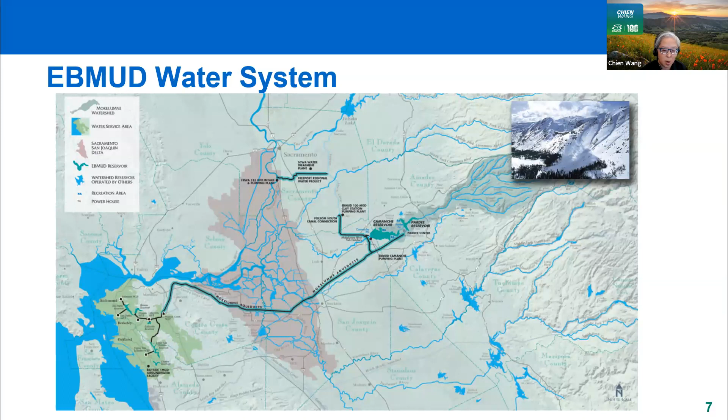East Bay MUD water starts as snowmelt in the Sierras in the Mokelumne watershed near Lodi, California. Water is then stored at the Pardee Reservoir before traveling about 90 miles through the Mokelumne aqueducts to the East Bay service area, where it is treated at one of East Bay MUD's water treatment plants, including the Walnut Creek water treatment plant. During droughts, we can also have supplemental water supplies delivered via the Freeport Regional Water Facility near Sacramento. The East Bay MUD service area distribution system, with 167 reservoirs, 136 pumping plants, and approximately 4,200 miles of pipelines, serves over 1.4 million customers and 29 cities over 2 counties.

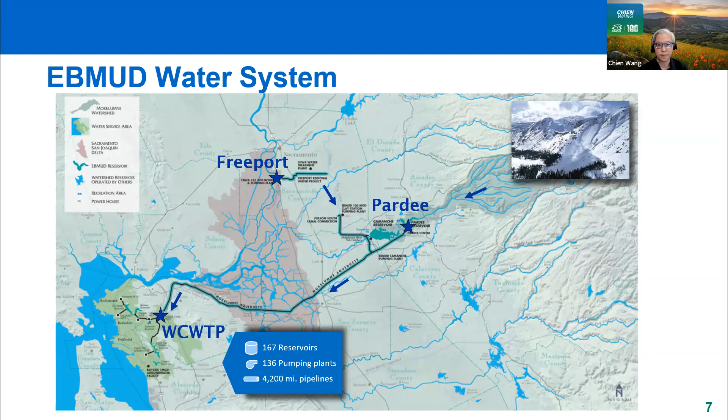The Walnut Creek water treatment plant was constructed in 1967, and the aerial photo on the left shows the plant at about 1 year old. In the photo, you can see the operations building and the gravity filters in the center, and the original clear well in white on the left, where water was stored before being pumped to customers. Alfred Avenue is on the right, and you can see the beginning stages of Ramsey Circle and Cornwall Court at the top of the photo.

The Walnut Creek water treatment plant provides the primary water supply for East Bay MUD's East of Hills service area, shown in blue on the right, including Walnut Creek and Lafayette, and portions of Pleasant Hill, Alamo, Danville, Blackhawk, and San Ramon Valley communities.

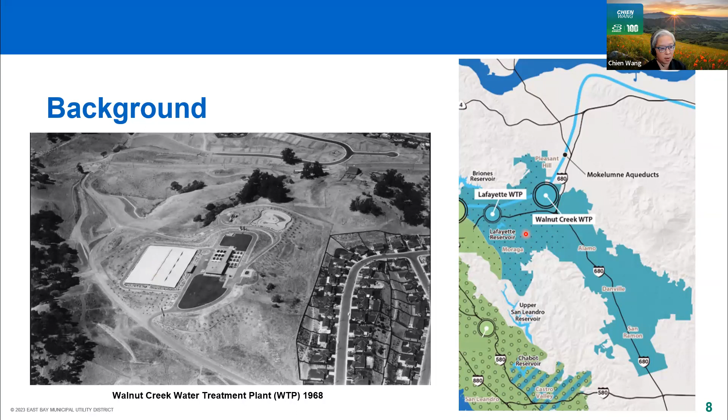The Walnut Creek water treatment plant was designed to use its inline gravity filters to treat clear snowmelt water from the Mokelumne watershed. However, due to climate change and other factors, the water treatment plant needs to adapt to changing source water quality, such as high rainfall runoff in atmospheric rivers.

So you can see in the photos here on the left of Pardee Reservoir, the effects of warm, heavy rains leading to high turbidities or murky water in the reservoir. We see that same turbid water arriving at the water treatment plant filters. Bottom right shows recent wildfires in the Mokelumne watershed. The watershed itself is outlined in blue, and recent fires from 2015, 2021, and 2022 are shown in red in the vicinity or even within parts of the watershed. We can now expect almost immediate effects on water quality from wildfires.

Also, the Walnut Creek water treatment plant needs to be able to treat and deliver supplemental supplies from the Freeport Regional Water Facility during droughts. These more frequent high turbidity events reduce the filtration capacity and add taste and odor at the Walnut Creek water treatment plant. So the purpose of the project is to treat a broader range of water quality on a more reliable basis, improve water quality, taste, and odor, and increase the water treatment plant capacity to meet planned future demands.

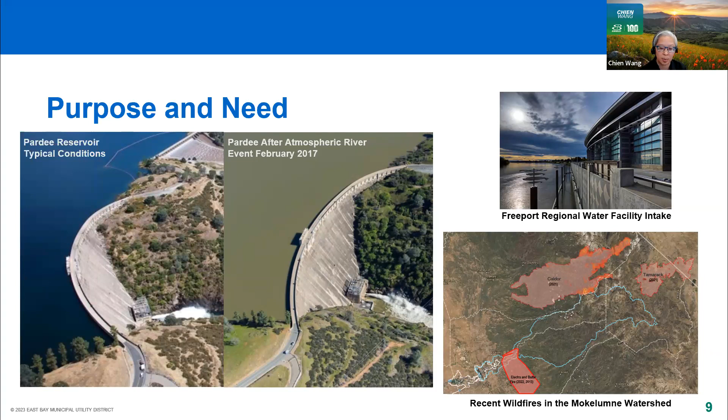Here is a site plan that shows the new project components. The entrance from Larkey Lane is at the bottom right, just for your reference. The project would be constructed in 2 phases because the plant is roughly bifurcated into 2 halves, with phase 1 components shown in purple and phase 2 components shown in blue.

The orange highlights the 4 ballasted flocculation basins, which can quickly treat high turbidity water in a very small footprint, where the water portion from these is sent to the existing filters, and the sediment portion at the bottom of the basins will drain to the new solids thickening facilities shown in brown. These are where solids from the basins will be dewatered and compacted before disposal.

The pink highlights the new ozone treatment that also addresses taste and odor before and after the ballasted flocculation basins. The building shown in dark green consolidates existing maintenance shops, lockers, and offices that need to be demolished for the project.

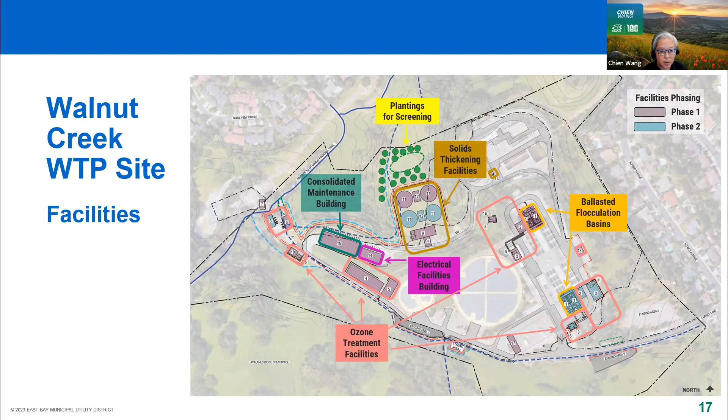At the top of this plan, the yellow shows where trees will be planted for screening north of the new gravity thickeners retaining wall that are part of the solids thickening facilities. The proposed buildings were designed so that their architecture would match existing buildings at the water treatment plant, which consist of a mix of concrete and metal structures.

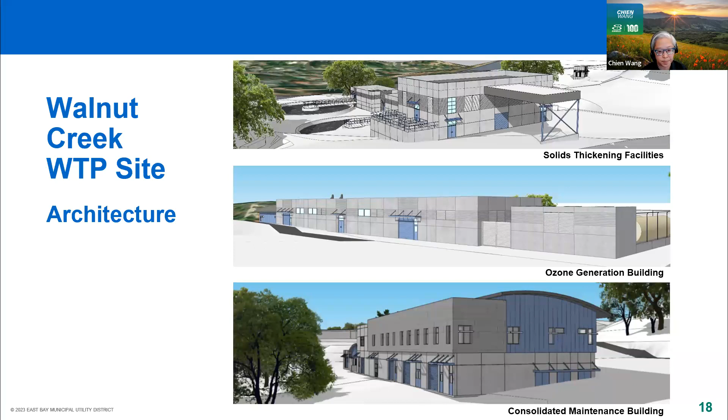The solids thickening building facilities include the 2-story concrete dewatering building and truck loading canopy shown at the top. The middle rendering shows the ozone generation building, and the bottom shows the 2-story consolidated maintenance building. Other smaller structures are similar in design.

A social footpath is an unofficial, user-created path that forms over time, established by the community through regular use. During construction, the existing social footpaths would be temporarily closed with appropriate signage for the duration of phases 1 and 2 for public safety.

After construction, security fencing will be installed around the new facilities, and social footpaths will be redirected around those new facilities and fencing as close to existing paths as possible at the end of phase 1.

The constructability analysis identified a need for staging areas in addition to existing spaces throughout the water treatment plant. So staging areas 1, 2, and 3 are new staging areas and will be constructed along the south side of the main access road. Staging area 4 is an existing parking lot near the entrance that will be used for material and equipment storage on the western half and for worker parking on the eastern half.

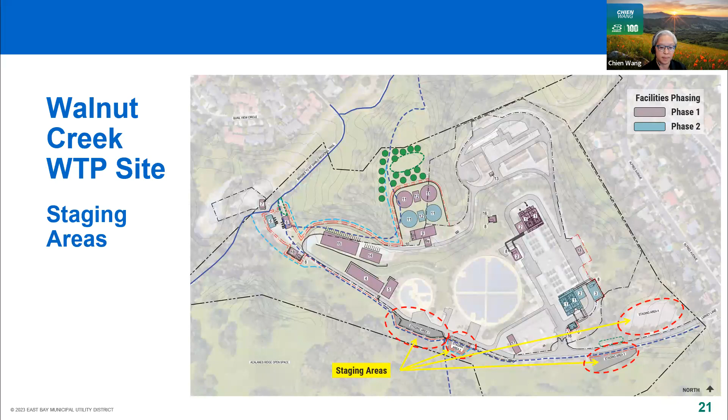As part of the new pretreatment processes at the Walnut Creek Water Treatment Plant, minor hydraulic modifications are required at the Lafayette Water Treatment Plant to increase the water pressure within the aqueducts serving the project.

The modifications at the Lafayette Water Treatment Plant will be completed during phase 1 of the project and include construction of a new Lafayette Weir number 1, increasing the height of the existing Lafayette Weir number 2 by approximately 10 feet, and new pipelines connecting to the weirs. After that, the existing old Lafayette Weir number 1 will be demolished.

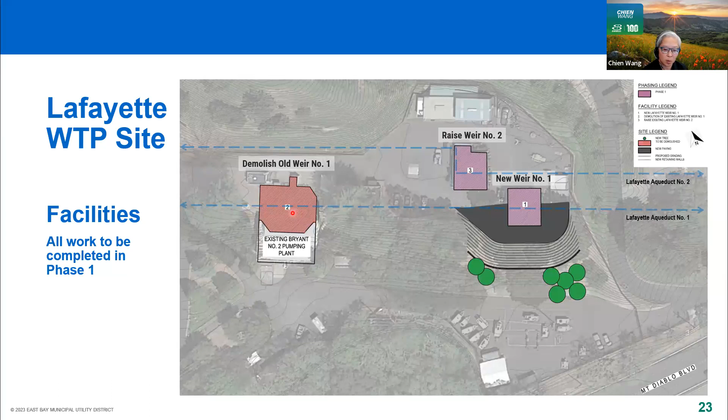Public outreach and notification has been ongoing throughout the EIR process. Outreach meetings with staff from the City of Walnut Creek, City of Lafayette, East Bay Regional Park District, and Temple Isaiah were held throughout 2021 and 2022.

A community outreach and scoping meeting was held in March, like I mentioned previously, to present the conceptual site and landscape plans and discuss the potential environmental factors to be addressed in the draft EIR and receive community feedback. Postcards about that community meeting were sent to affected residents near the project and posted on Nextdoor and the district's website. A project briefing was provided to the City of Walnut Creek City Council in March of 2023.

The 2 closest schools, Buena Vista Elementary and Contra Costa Christian Schools, were also notified of the publication of the draft EIR.

Issues and concerns raised by agency staff, the Walnut Creek City Council, and the community included construction-related traffic, noise, and dust, and potential impacts on trails and open space, as well as aesthetics, all of which are addressed in the draft EIR.

In every project, EBMUD incorporates standard practices and procedures and construction specifications to ensure best management practices for issues such as dust, noise, and traffic are implemented. The next few slides will go over some of these standard practices.

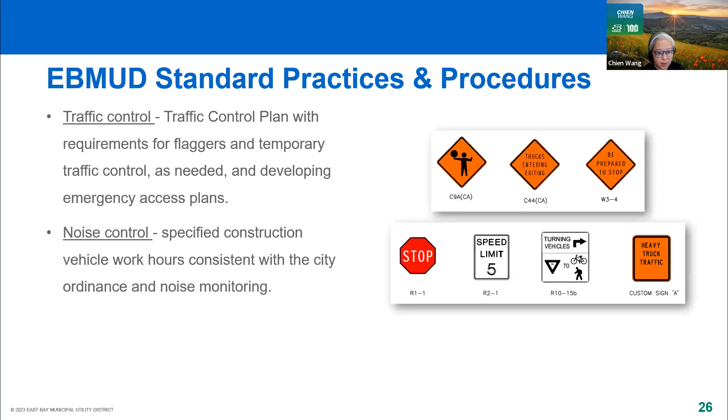For traffic control, a traffic control plan will be required to manage flaggers and temporary controls as needed, and for developing emergency access plans. Also, noise control measures will include specified construction vehicle work hours consistent with the city ordinance and noise monitoring.

For the protection of biological resources, there will be required training on special status species, pre-construction biological surveys, and avoidance measures if any species are encountered.

For the protection of cultural and paleontological resources, there will also be resource awareness training and immediate stop work and EBMUD notification if any unexpected encounters occur.

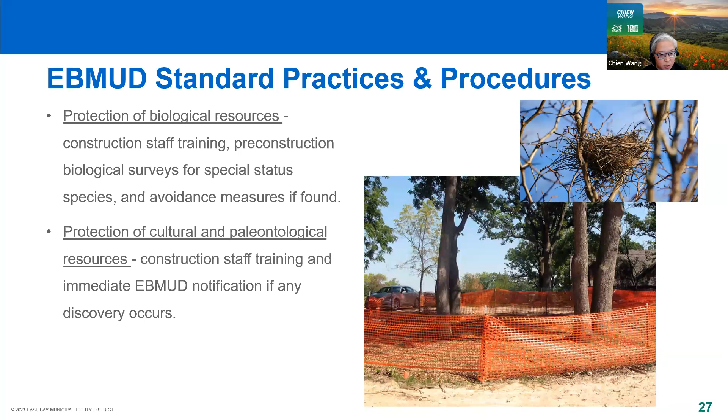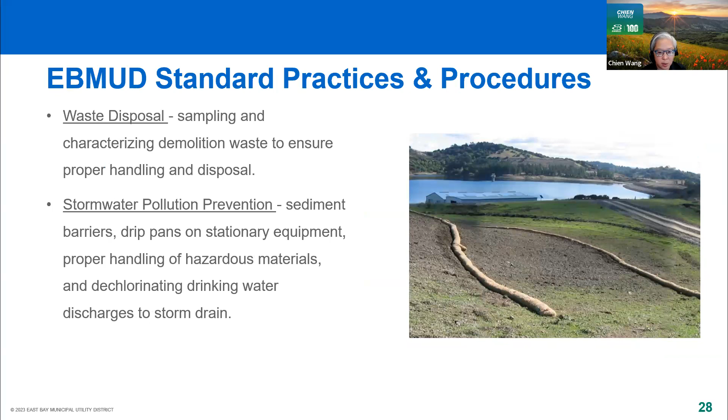For waste disposal, EBMUD has procedures that require sampling and characterizing demolition waste to ensure proper handling and disposal. For stormwater pollution prevention, sediment barriers, drip pans, and dechlorinating drinking water discharges will be required.

EBMUD standard practices also include designating a public affairs liaison to respond to construction-related concerns from the community, and notification in advance of potentially disruptive construction activities such as noise or traffic, including extent and duration of the activity.

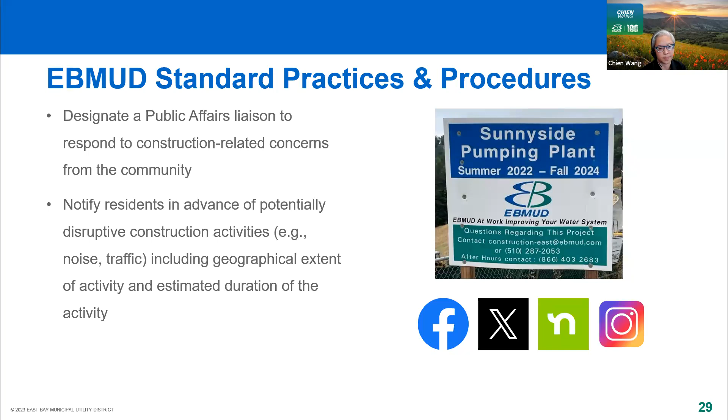Also, one specific aspect of noise was determined to be a significant and unavoidable impact. I'll go into detail on that on a later slide.

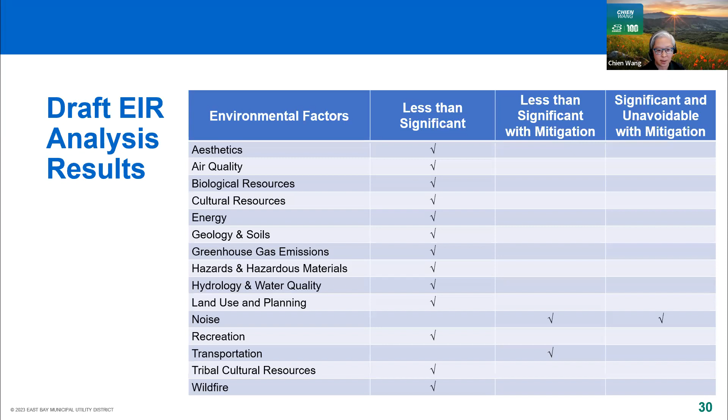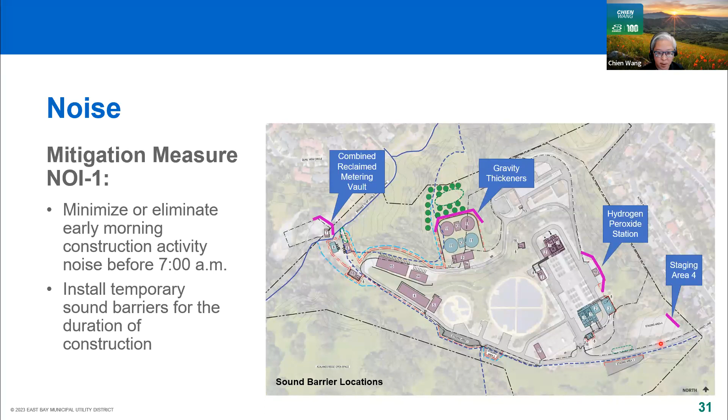For the noise mitigation measures that are required for the project, these emphasize the need to minimize or eliminate early morning construction noise before 7 a.m. And also it requires the installation of temporary sound barriers for the duration of construction at 4 locations. These include the combined reclaimed metering vault, the gravity thickeners, the hydrogen peroxide station, and at staging area 4 along the eastern side of that staging area.

The significant and unavoidable impact I mentioned earlier applies to early morning hour concrete truck noise that is anticipated during extended large concrete pours. These extended pours require a start time of 6 a.m. to minimize disruptions in the pour that could affect the quality of the concrete work and service life of the new facilities being constructed.

The noise is significant and unavoidable for the off-site concrete trucks along the haul route before 7 a.m. We estimate about 40 days of this extended pour work during phase 1 and 15 days during phase 2.

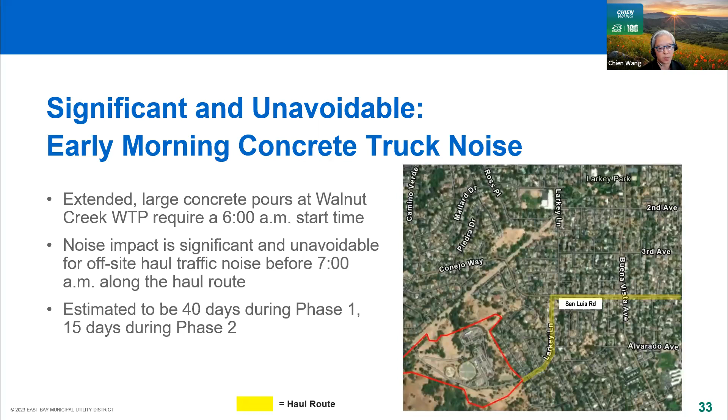There are also 2 traffic mitigation measures. The first mitigation measure will restrict heavy truck traffic to between 9 a.m. and 3:30 p.m. to and from the Walnut Creek water treatment plant. It will also require heavy construction vehicle traffic safety monitoring, including radar feedback speed signs on Larkey Lane, and pre- and post-construction video monitoring of the truck haul route pavement conditions.

The second traffic mitigation measure provides a traffic control flagger at the intersection of Larkey Lane and Alvarado Avenue on workdays during local schools pickup and drop-off times. The contractor will be required to coordinate with Contra Costa Christian Schools and Buena Vista Elementary School schedules.

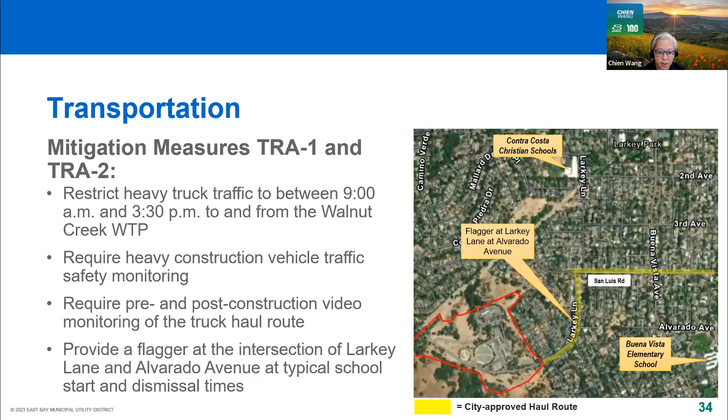So I've discussed a lot of different work hours with the mitigation measures. This slide shows a summary of project work hours that were discussed. No other construction activities were permitted on weekends or during East Bay MUD holidays during any work period, except for emergencies or for critical work with prior notice to and approval by East Bay MUD.

The work hours are 7 a.m. to 6 p.m. Workers may arrive and depart 30 minutes before or after work hours. The concrete trucks will be allowed for 12-hour durations from 6 a.m. to 6 p.m. to accommodate extended concrete pours. However, the soil and demolition off-haul and large equipment delivery trucks will be restricted to 9 a.m. to 3:30 p.m.

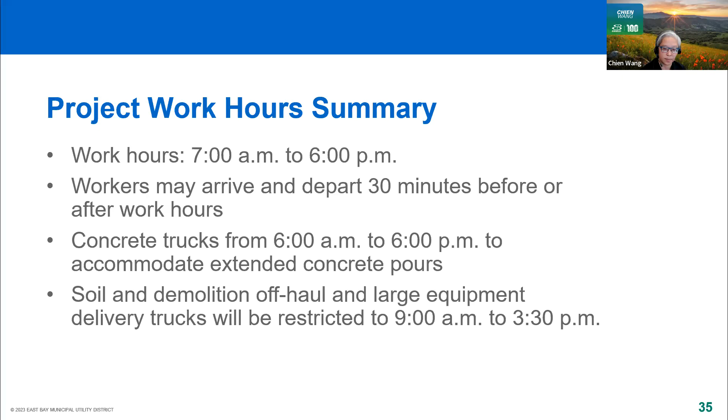The next steps for the project include the public review period, as mentioned before, 45 days, which ends on November 13th. Final EIR and East Bay MUD board consideration in June of 2024. Design anticipated to be from 2024 to 2027, and construction of phase 1 beginning in 2027, with the construction of phase 2 to be determined.

I invite you to go to our website, which has more information, and it will be updated as the progress continues. There's also for your downloading, you can download a lot of different items, including the 3 volumes of the draft EIR.

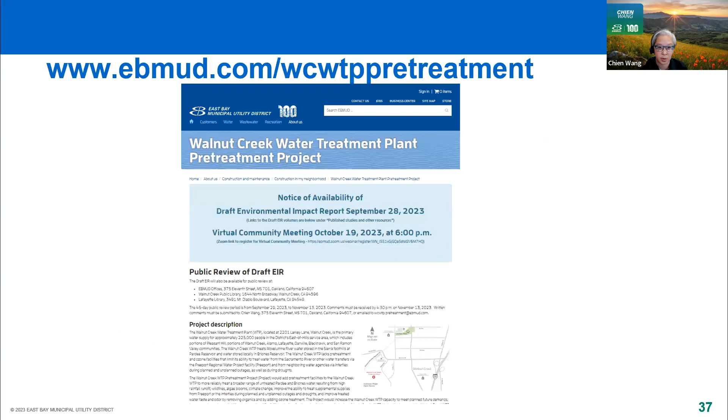I can answer that. If you let me go back to the paths slide, I can answer that better with that graphic.

So here we have a picture of the Walnut Creek water treatment plant. In blue is the East Bay Regional Park District's Briones to Mount Diablo Regional Trail. This will not be affected by the project because this trail continues to go along the northwestern border of the water treatment plant and won't need to be closed there. The trail that I discussed being closed would be here, approximately here, the existing social footpath, because it currently goes through areas that will need to go under excavation or construction.

Our next comment comes from an anonymous attendee. After the upgrades are completed, will there be any odors coming from this plant during its normal day-to-day operation? No, there shouldn't be any odors in the long-term operation of this project after project completion.

And then we've got another comment from Peter Green. Hello, we live on Alfred Avenue. We are concerned about the staging area for both storage and sound barrier. Is it possible to have these supplies stored on other sites of the treatment plant?

What we're doing with the constructability analysis, it found that we're using all the available space that we have on the water treatment plant. And even with the available space at the plant within the site, we still need to construct those 3 other staging areas, 1, 2, and 3.

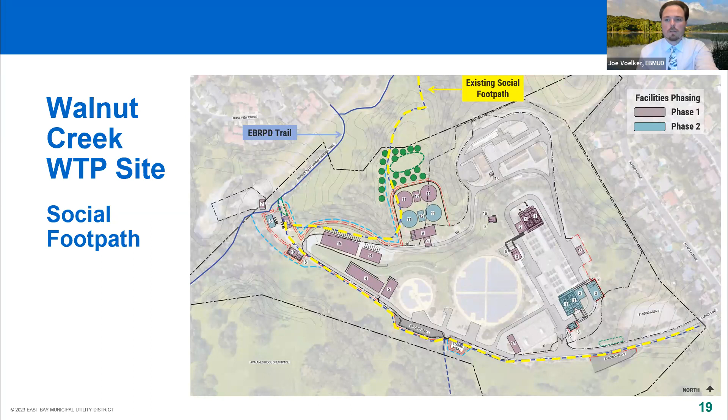How long are we planning the sound barriers to be up? For the duration of phase 1 and phase 2, as needed. And then Julia, I see your hand is up, so I'm going to go ahead and ask you to unmute.

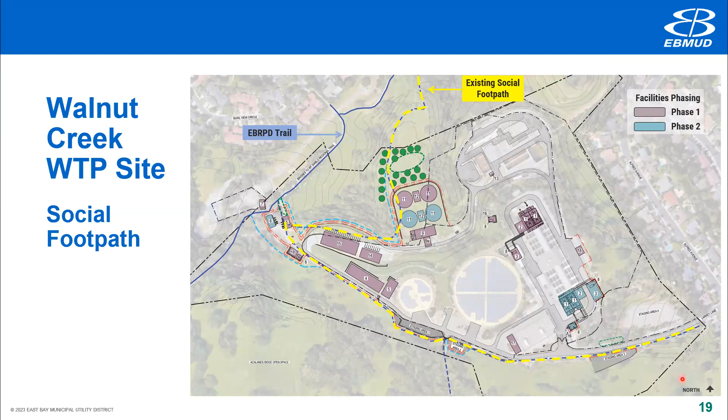The sound barriers look pretty industrial. Is there any way there would be an improved look to that? If that slide was up very quickly on the screen, perhaps you can put that back up again. And then I want to chime in on Derek's point.

With the idling of the vehicles, I understand that has happened in the past without question. Will there be any vehicles delivering materials for staging area 4 that will be allowed to idle, because those diesel engines are atrocious for residential neighborhoods?

So the two questions: this is a pretty unsightly looking sound barrier. That would be a pretty ugly look for 5 years. Is there any way that can be improved?

I think we can consider your comment for sure. I haven't seen the total variety of sound barriers that exist, so we can definitely examine that issue. They will be placed at the end of the parking lot, so there will still be that green space and trees between your houses and that parking lot. But yes, I totally do understand your comment, and we will take a look at that.

And then the second part was on the idling within the staging area. Somehow or other, I guess with diesels, they don't like to turn them off. But we have a history here of listening to diesel engines, so I would be concerned if that would be occurring in staging area 4.

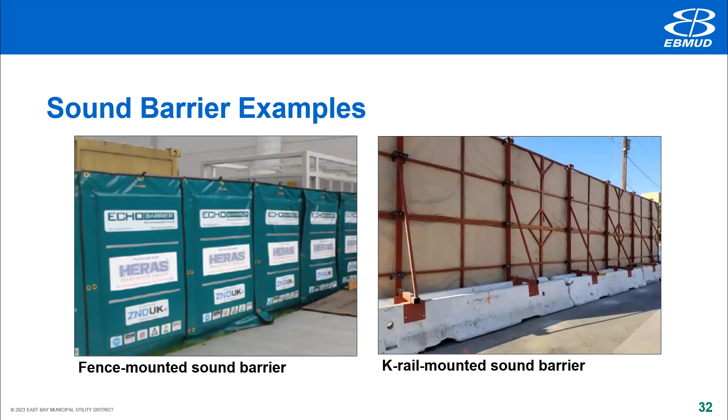There is a general diesel engine idling limit of 2 minutes in the draft EIR, so that idling time would be limited via the construction specifications. But yes, that would depend on the types of work happening there, and that's mostly equipment stockpiling, equipment storage, and parking. So the intent is for the diesel engines to be minimized at staging area 4.

Thank you. So Norman has a question: what are people with allergies to do? You did say something about minimizing dust, but it will be there to some extent.

Yes, what we have in our specs is that trucks hauling soil will be covered, and stockpiles will be covered as well. There will also be other dust controls, including wetting down disturbed areas. We will also be hydroseeding and planting disturbed areas where we can, to minimize large areas of uncovered soil.

Do we have any other questions from anybody in the audience? Feel free to type your questions in the Q&A section at the bottom or raise your hand like others have. Seeing nothing new coming in, no new hands being raised.

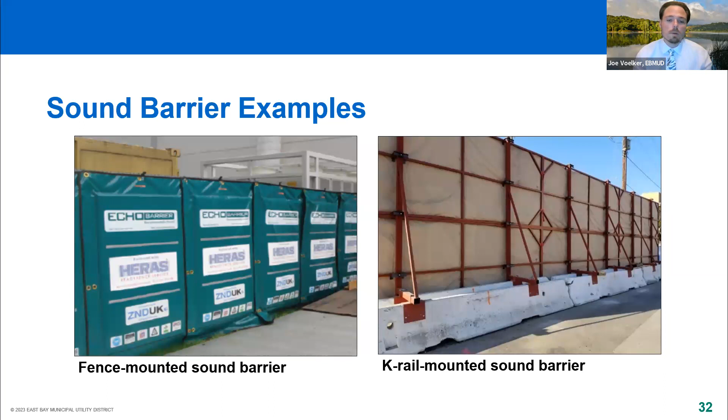Yeah, so that's a good segue, Marty. This recording will be posted on the project webpage that Chen referred to at the end of the PowerPoint presentation. It'll be up within a week on the project webpage, and everybody will be able to watch this meeting over. And I do again encourage those looking for more information to go ahead and download volume 1 of the draft EIR. There's a lot of information and detail in there, section by section. And even if you don't read the whole thing, there are tables and figures that are very illustrative of the points we are making in the draft EIR.

Do we have any other questions? Seeing none coming in on the question and answer chat, or any hands raised on Zoom.